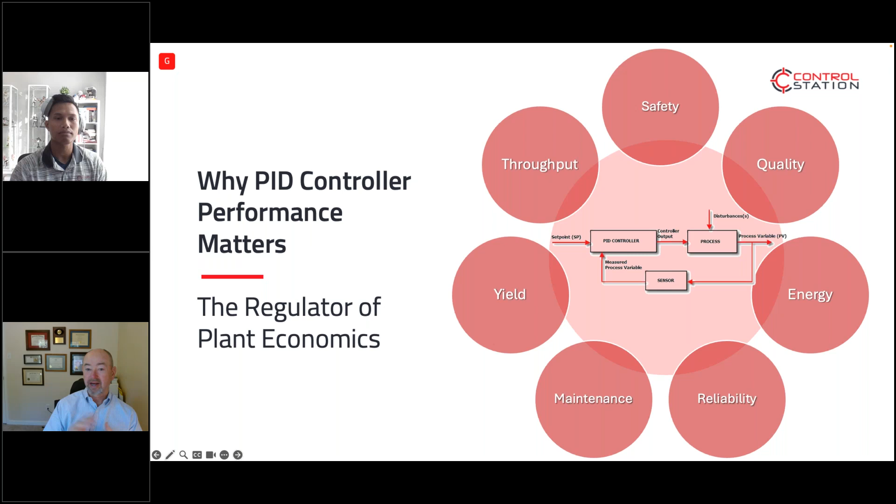And so just going back to the idea that this is the regulator of plant economics, you'll see in that circle, each of those topics have something to do with the profitability of the plant, right? Whether it's safety, quality, energy, reliability, maintenance, yield. The PID controller is responsible in some aspects to each of those. Exactly. And on the next slide, we'll explore some of that a little bit deeper. So what can go wrong with the PID controller that affects all of these parts of the process?

Well, certainly, the thing we always think about and talk about first, what jumps to mind is, what about controller tuning? If the controller is tuned too hot or too fast, the process can start oscillating, swinging around, which causes a lack of efficiency, some instability, quality problems, a whole bunch of different things. But there are many other ways that PID controls can fail to do their job. The valve may be sticky, right? And there's no amount of tuning that will fix a sticky valve.

Or you might have some changes in the process dynamics and the way the process performs that has not been adapted to. We haven't adapted our PID control to the new dynamics in the process. A very common thing, as I mentioned in that last slide, was that loops can be left in manual. If a controller is left in manual, it doesn't matter what kind of valve it has, what kind of tuning it has, how it's configured, it's turned off. It's not going to do anything. So how can you expect your plant to operate at its best performance when the controller is left in manual?

And we'll see later that that can also be a sign that maybe something else is wrong in the process. So all the components of the PID controller, the instrument, the valve, the controller itself, its configuration, its tuning, how things are maintained, how it's operated, what mode it's left in, what are the allowable modes, all of those things can have an impact on the performance of the process. And so when we talk about benchmarking, we have to find a way to deal with all these possible things that could be going wrong with the PID controller so that we can make sure that our plant is operating at its best. So that's what we're going to dive into in this webinar today.

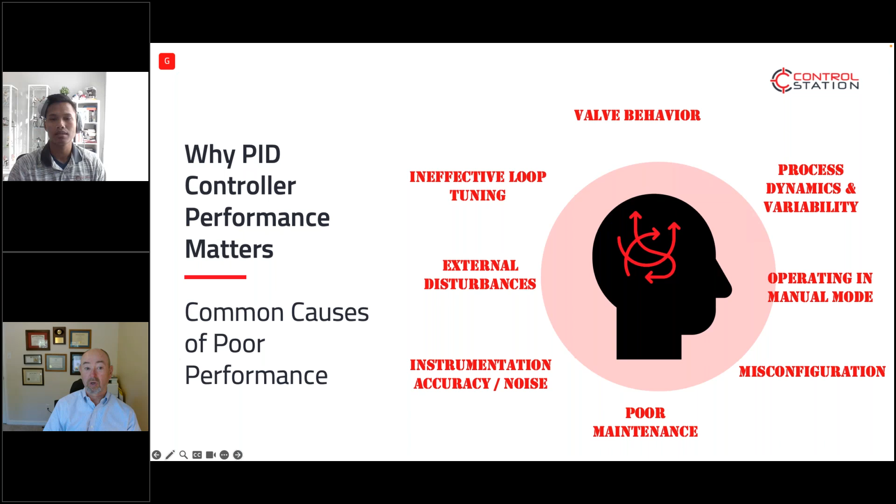Absolutely, absolutely. Well, let's go on to the next slide here. Yeah.

So we talk about the PID controller being almost the brains of the plant. How can we assess its performance? A lot of what we do when we deploy our monitoring software is we benchmark. So what's benchmarking? I like to do a sports analogy, especially running, because I'm a runner. So when you're benchmarking something, you measure to a certain standard, right?

For me, when I'm preparing to run for a 5K, I want to make sure that my run time is around 21 minutes, right? And that's a pretty good benchmark for me. But for people who run all the time, or high-level athletes, they're aiming for 16 minutes, 17 minutes 5Ks. Whereas some people who don't run at all, maybe a 30-minute is where they're at. But it just goes to show, right?

How do you know where you stand, or where do you want to be when you benchmark? Where do you set your standards, basically? And there can be a variety of ways, right? Whether it's best in company. You have 5 different sites that are very similar. Are you comparing against those other 5 sites, or are you comparing against the whole industry, whether you're in mining, chemicals, food and beverage, or do you want to compare against just other loops within your own plant? So the way you benchmark or assess performance is really going to depend on the standard that you set your benchmarking against.

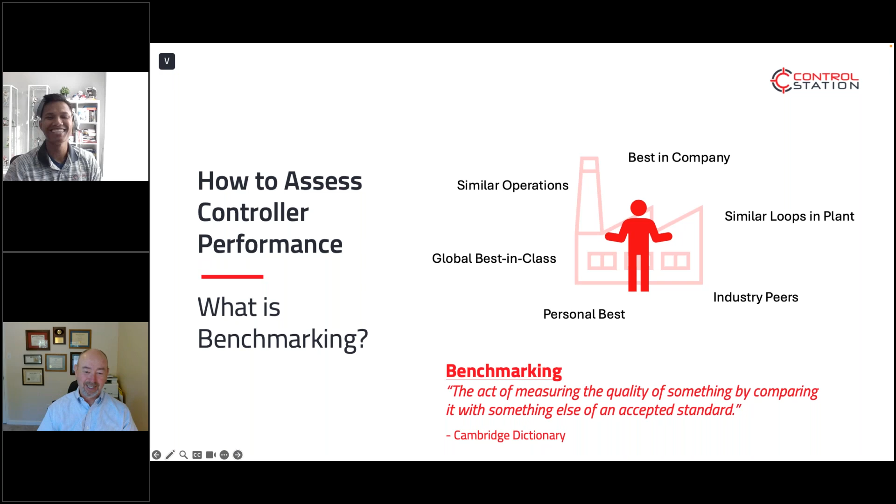So when we talk about doing this kind of benchmarking, the question quickly becomes, well, what do I compare against? Do I compare against my own industry? If I'm in the food industry, do I just compare against controllers in the food industry? If I'm in mining, do I compare against mining? Do I compare unit operations?

A boiler is a boiler is a boiler. Do I compare boilers to each other? Do I compare flow loops to flow loops? Is there a way to compare level loops to pressure loops? How do I decide what I'm going to compare against? And which kind of metrics should I use to compare?

Should I use the metrics that maybe I was taught at the university level, things like integral of absolute error or percent of overshoot on a step change in set point? What are the right metrics to compare, and what are the right groups to compare against? So this idea of benchmarking can quickly get really, really complicated.

I can think of probably 60 or 70 metrics you could perform on an individual control loop, and you're certainly not going to want to benchmark 70 metrics across 1,000 control loops to try to see where you stand. We need to do some kind of comparison where we can get an apples to apples comparison, something simple

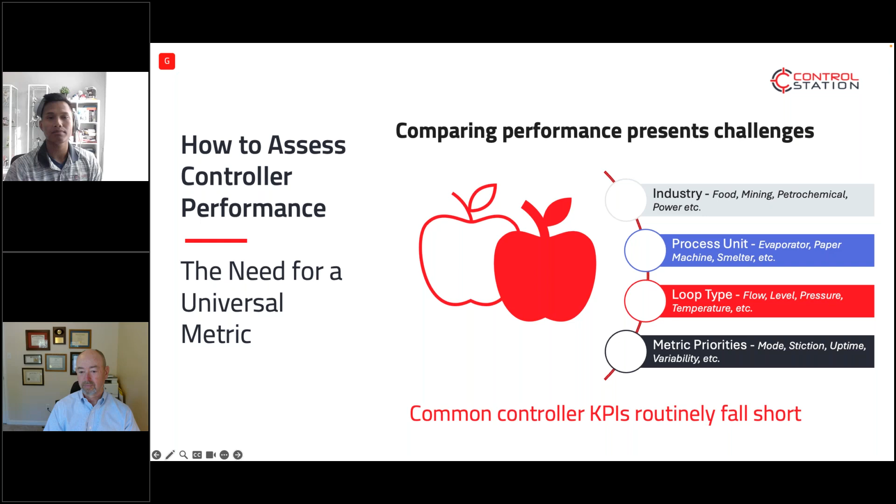Yeah, and just to drive home that point, the need for apples to apples comparison, right? One of our customers, they know that the flow loop definitely behaves differently from their level loop. So to compare the absolute error of the flow loop against the absolute error of a level loop, it's not useful at all. And so that need for, I don't care if it's a flow or a level, how can I look at it objectively and know that the controller itself is doing well? That's really what's necessary. Right. Okay.

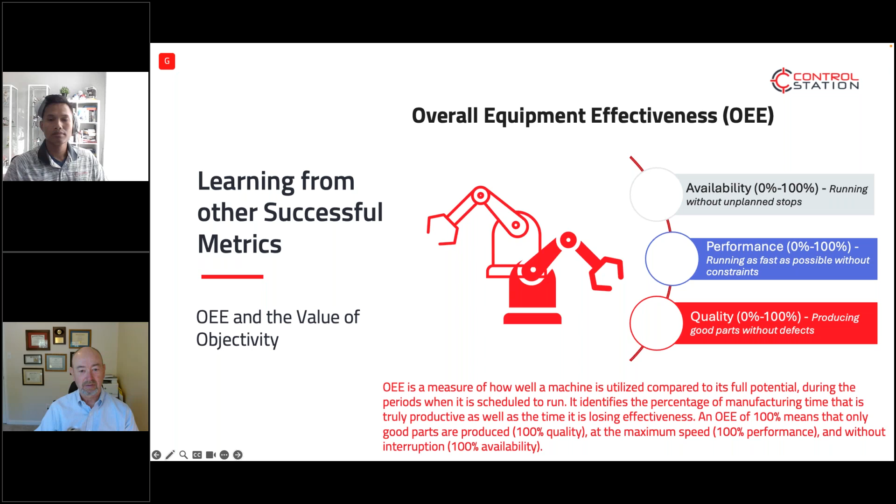So going back to what George said about OEE, that's been a metric that's been around 50+ years. And academics have tried to come up with sort of an analog for that in the PID controller world, right? There was the Harris index, and the integral absolute error, and all of these other metrics that are very useful from an academic standpoint, where there's easy-to-see numbers from perfectly generated step tests and whatnot. But in the real world, things are not as easy to record or capture.

So we looked at the OEE metric and we said, okay, the factors that are being brought into OEE make sense, and can we apply that to the PID controller? In other words, how can we measure the availability of a controller, the quality, the performance, right? We want to capture that, not for a specific equipment, but for the controls itself.

And so at over 35 different sites, collecting 35,000 different loops, we collated all of this data, and we said, okay, of all these metrics that we're collecting, which one can we use as an analog for these three: availability, quality, and performance? We picked about 4 of them, and we worked with the University of Connecticut, and we said, we need a way to correlate these metrics with the performance of the controllers. So which ones make sense?

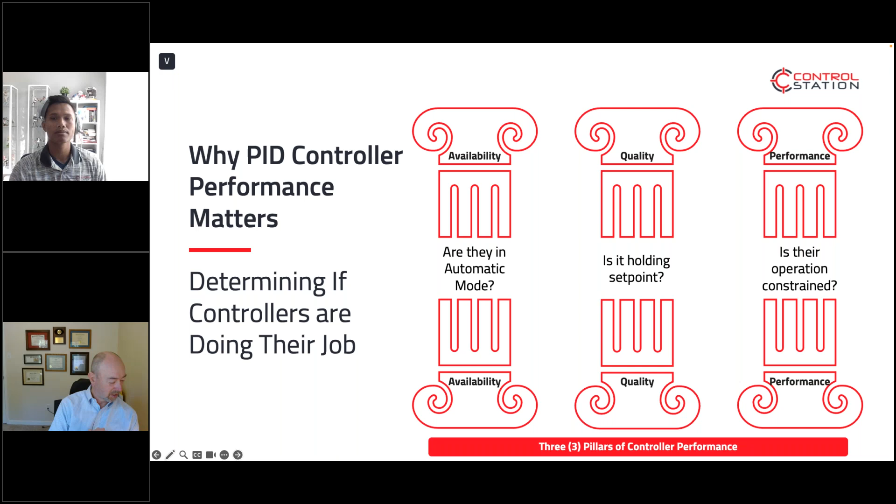Right, and similarly to OEE, this is a nice, simple 3-component way to evaluate the controller that we'll see is pretty universal. So we can go on to the next slide and look at how practical this is as a metric. So we have our 3 components: availability, quality, and performance, and we can evaluate an individual control loop against these 3 components pretty readily and have an answer to that question that Vince was just asking us, which is, is the controller doing its job?

If it's left in manual mode, it's not doing its job. If it's oscillating all around and never landing on set point, it's not doing its job. If the valve is always 100% open and there's no control happening, it's not doing its job. So those three components together, we look at a control loop and we say, is it meeting all three of these requirements? And if it is meeting all three of those requirements all the time, then its overall controller effectiveness is 100%. To the extent that it's lower than that, then it's going to have a lower and lower level of performance, and therefore need a higher and higher level of intervention to resolve what's going on.

And the great thing about this metric is you don't need to know anything else really about the controller to use OCE. You don't need to know about the scale of the controller. You don't need to know about the speed of response. You don't even need to know whether it's a flow loop or a temperature loop or a level loop, or whether you're in a plant that's making ketchup or a refinery making oil and gasoline. It really doesn't matter. We can use this metric universally across all control loops to evaluate how do we stand? How does this controller stand? It's a very good overall high-level metric that can be used universally everywhere.

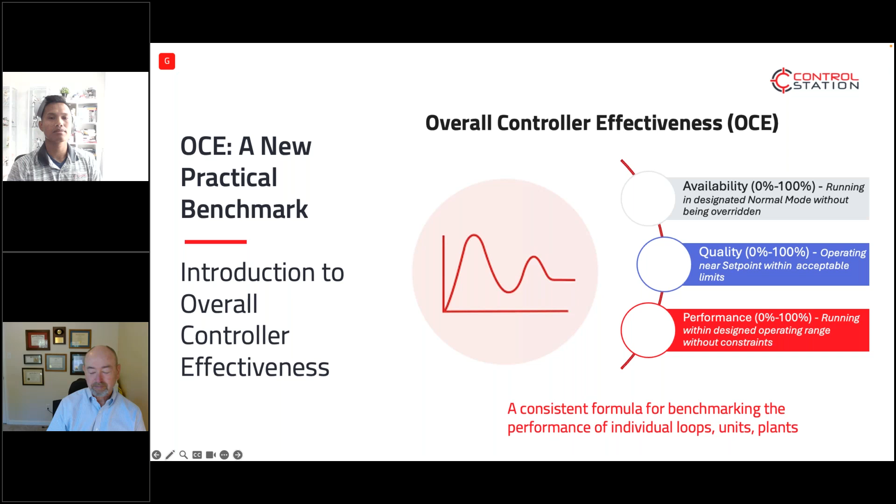So we have, with OCE, achieved our apples to apples metric, right? I can say, well, if I have loops that are operating at 0% OCE and loops that are operating at 100% OCE, I know where to work. I need to go work on the ones that have 0% OCE. All those other metrics, those 70 or 80 other metrics that you could do on a control loop, doesn't matter. I know for sure if I have a loop with an OCE that's very low, that's a place where I need to work. So I'm easily able to identify those worst performing controllers and use that to help set priorities.

But even beyond that, for an individual loop, what's interesting about OCE is we can aggregate it. We can take the average OCE for an entire process or even for an entire plant and use that in a meaningful way to benchmark performance. If I go back to the example I gave before, if I have a plant with 5 production lines that are all similar, I could look at the average OCE for each one of those 5 production lines and have some idea where I should put my effort with control engineers and instrument technicians at the plant. I can very quickly identify where we should put resources to help what's going on.

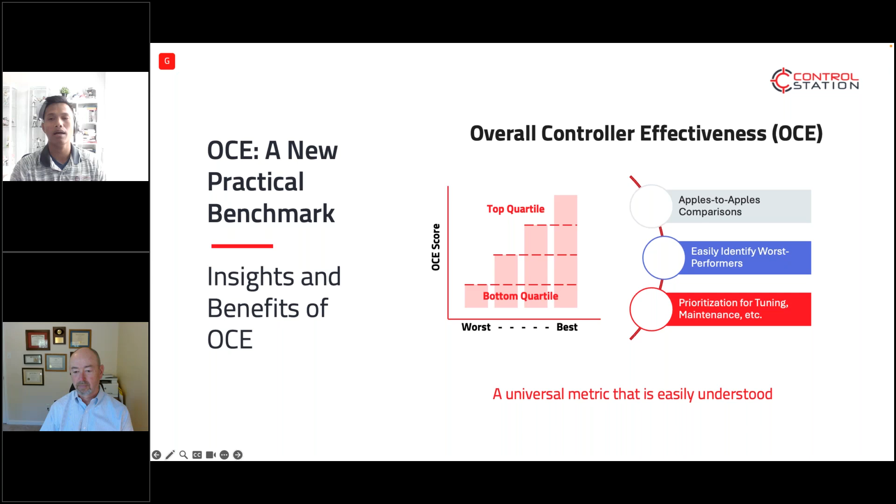And so as control engineers, you're really balancing your availability, the time you have to work on PID loops and to do all of your other job functions, right? And so OCE really gives you that: okay, these are the low-hanging fruits. Let's compare it against my assessment of what I know of the plant, and let's go improve things. And so we'll see in these upcoming case studies how OCE is actually being used in industry.

So in this case, we have a mining company with three different sites that are very similar. This company specializes in copper, gold, molybdenum extraction and processing. So all of their sites have very similar equipment, flotation cells and conveyors, all of that. And so they really wanted to know, how is the effectiveness of our PID controllers at this specific site compared to my peer sites, peer facility?

Again, we have the exact or very similar equipment. We have very similar control strategies, very similar historians. How can we compare a site somewhere in Arizona to a different site in Utah, etc.? So what they did is over the period of 6 months, they captured the OCE data.

So this chart here, I just wanted to briefly cover on the left. This is our data set of 35,000 different loops across 30 different sites. Not all the same industry, just different industries. You'll see the ones highlighted are the actual mining company sites that they wanted to compare to. So these are different locations, but very similar equipment. We're tracking their OCE score.

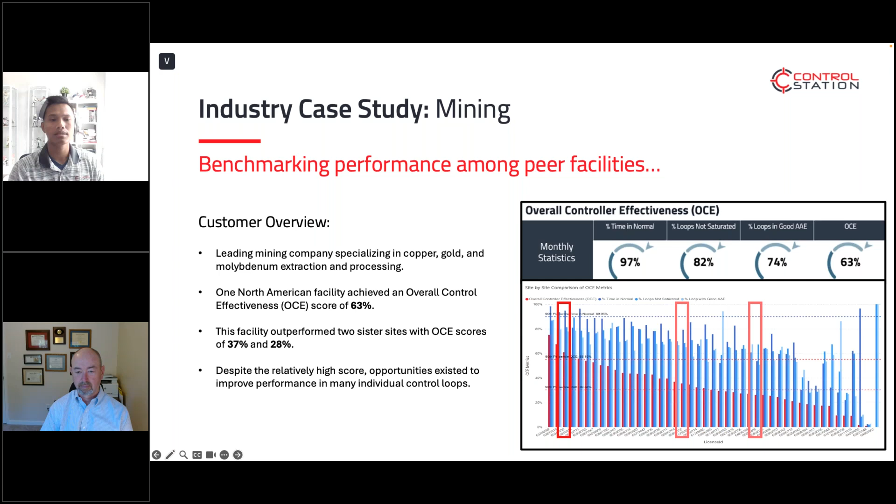And so one of the components of the OCE score is the availability. When your controller is not operating in its normal mode, it means one of two things. There's either a remote mode being applied to it by the DCS or control system, or most likely the operator has overridden that mode. So the operator has taken control, they manually override it, and they're controlling it by themselves without the PID actually doing anything. So it's really a silent drain coming from these manual overrides.

It's the operator stepping in for quick fixes, and sometimes you want to get into the rhythm of asking why did they do that, right? Because there could be a host of issues, whether or not it's the operator trusting the control system or the PID to do its job, or allowing the control loop to do its job because the instrumentation has the right sensor data coming in, right?

Or neglected maintenance, whether or not the hardware has been neglected. Now you have sticky valves and aging sensors and plugged lines, and they're sending all the wrong signals down the wire. And so the PID is not doing its job, and now the operator has to override it. So Vince, I always say that a loop in manual is not the problem. It's a symptom that there's an underlying problem.

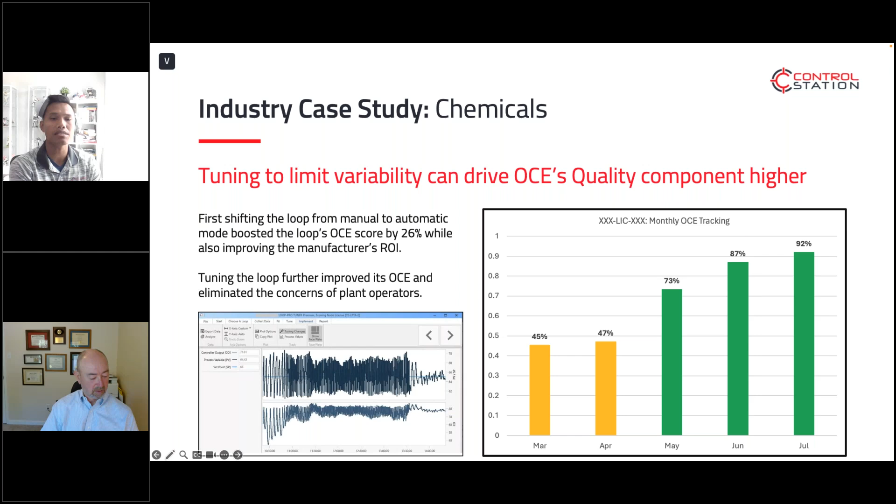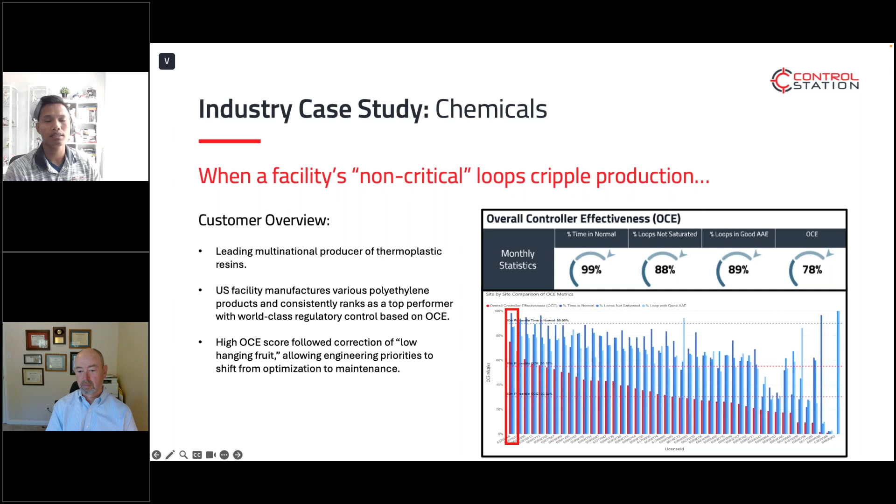And having this high OCE score allows them to maintain and optimize where they are and have visibility into the low-hanging fruit, the actual loops that are driving their score down. And we'll see, if you can go to the next slide, in this case, OCE allows them to not look at all of the different metrics and just focus in on the ones that they can improve so that they can maintain their world-class OCE status among all of their peers across all the different industries. And I'll turn it back to George to talk about the flood of different KPIs and why OCE stands out as a metric.

Thanks, Vince. I think it's really important to realize that, yeah, there are these 60, 70, 80, whatever other metrics you can use for control performance. Are they irrelevant? Well, no, not at all. In fact, OCE is a really good metric to drive us toward the loops that need improvement, so we can identify which loops need improvement.

And then all these other diagnostics are what help us dive into what is the specific problem. It's almost kind of like going to the doctor, right? You don't go to the doctor on days when you're feeling great. If your OCE is really high, if you're feeling really good, you're able to do all the things you normally do, you don't go to the doctor that day. But when you're feeling poorly, you go to the doctor, and then what do they do? They take your blood pressure, they take your heart rate, you get blood work done, you get all these other things done, and then we can diagnose what's actually going on with you.